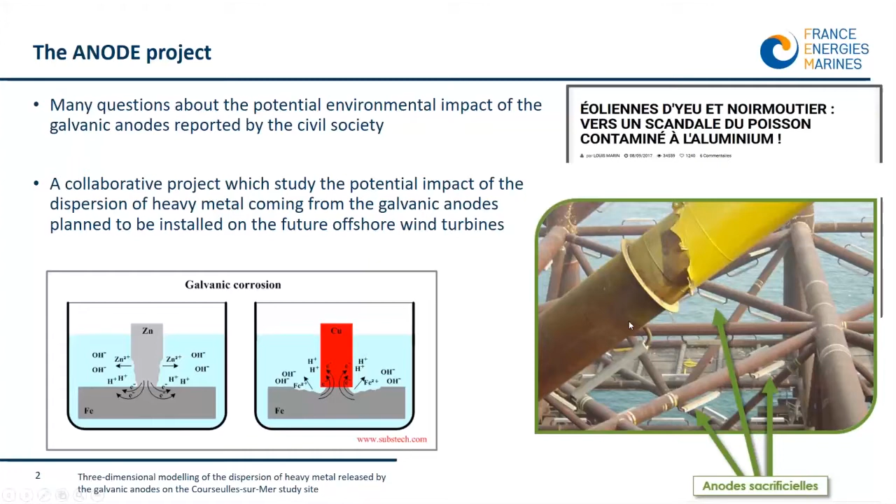Here I will present the numerical modeling on the Courseulles-sur-mer site. This site is located on the north coast of France, in the English Channel. We have performed numerical modeling to know what the dispersion of the heavy metal coming from the galvanic anode will be.

I will not present the validation today, but just to let you know that we have validated the configuration with 2 tidal gauges, one in Le Havre Harbor and another one close to the mouth of the Seine River. We have also validated the variation of the temperature and salinity of the water, which could influence the dispersion of the metal in the domain.

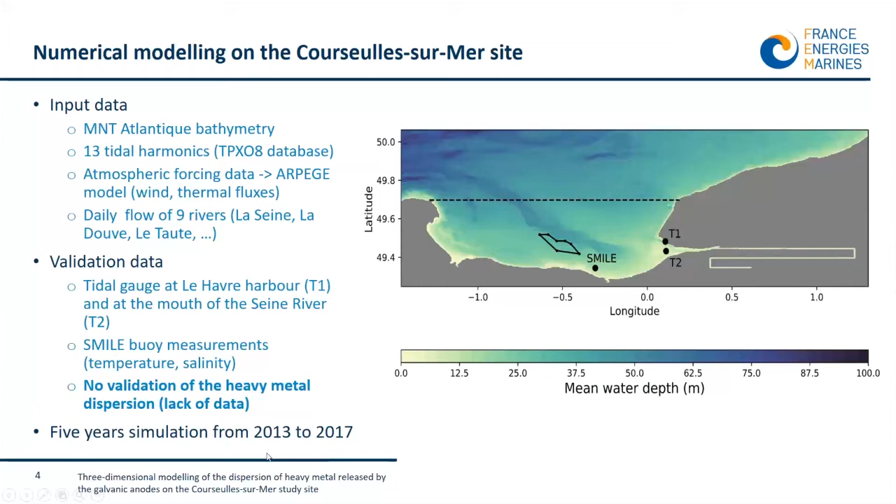However, we don't validate the dispersion itself because of the lack of data, which is one of the first recommendations coming out of the project. This simulation was performed for 5 years, from 2013 to 2017 included.

We have estimated that at each point, every time step of the model, so every 30 seconds, the 15 tons of anode planned to be installed on each wind turbine would release, for example, 455 milligrams of aluminium. So every time step at each point, we diluted this mass of each metal into the domain.

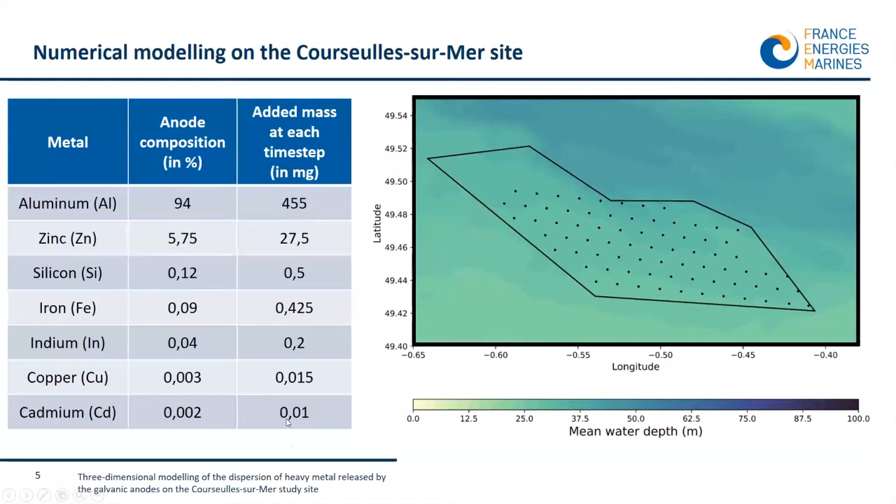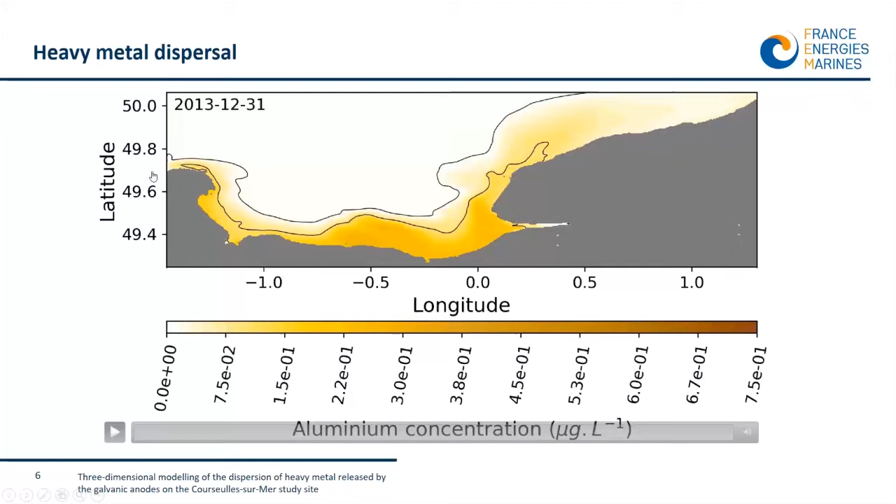The residual currents show us that every metal that will go out through the boundary would be re-injected into the English Channel through the north, and will not come back to this area. So we have considered that every aluminum coming out of this boundary is deleted from the simulation.

So how do we consider the toxicity of each metal? First, for each of them, we have considered that they are entirely dissolved into the water column to be the most bioavailable for each species, which gives us highly protective results.

We compare the results of the simulation to the predicted no-effect concentration, also known as the PNEC, for all metals. For the aluminium, we have two PNECs: one coming from Crane et al. 2007, which is 0.005 microgram per liter. So this is the toxicity threshold. However, it considers only the aluminium isomeric monomeric, so it's just a small part of the total dissolved aluminium into the water.

And we have considered another PNEC equal to 24 microgram per liter, coming from another article, which considers all the dissolved aluminium into the water. However, based on the Klimisch criteria, which tells us that both PNECs are not fully satisfying and need more investigation. However, we only have this data available, so we have to run our analysis with these two thresholds.

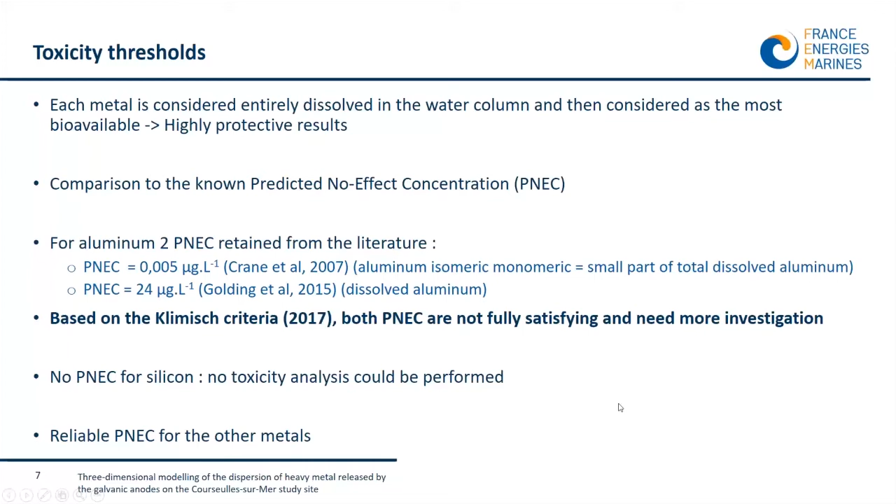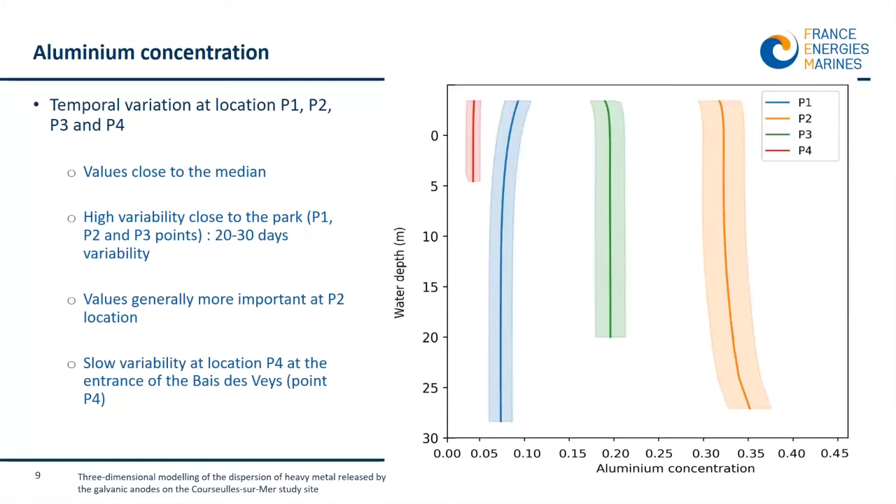What if we look at the 4 points in this domain? First of all, this is a 3-dimensional simulation, so if we look at the aluminium concentration along the water column, we can see that at each spot we have an almost constant concentration. So we will look only at what happens close to the bed, which is the location of the anode on the pile of the wind turbine.

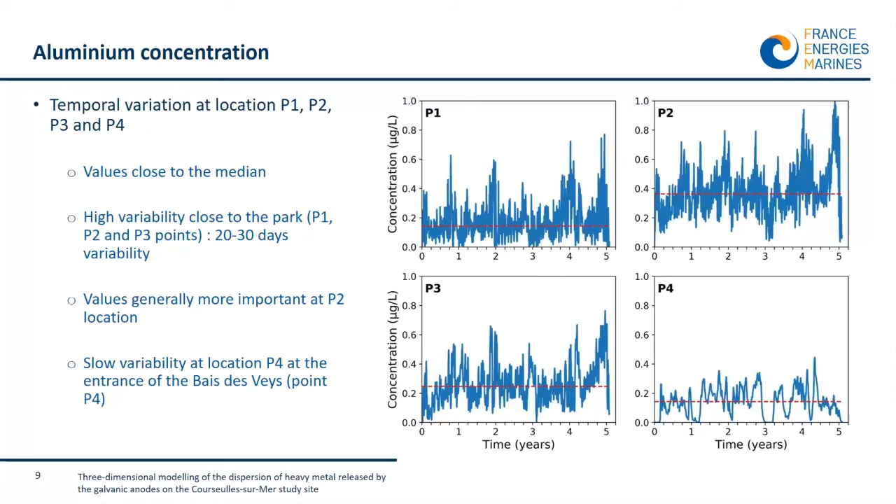So we have to consider the maximum short time exposure and the long time exposure, because we have some species who just pass through this location and others who live at those locations. If we look close to the park, so the first three points...

What is the maximal short time exposure over 2 days? We can see values around 0.8 microgram per liter. And if we look at the long time exposure at the same location, we can see that it decreased a lot, with values close to 0.5.

On the fourth location, the short exposure shows a value of 0.4 microgram per liter, while the long exposure is close to 0.3.

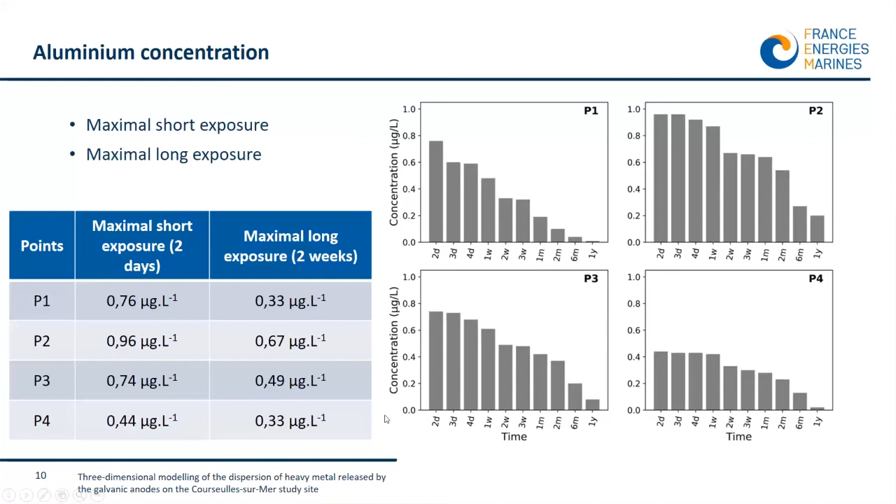All these numbers do not necessarily mean something for you, so here are some numbers to compare with.

We have seen in an article, Gabelle et al. 2012, that he measured in the Seine estuary, very close to the park, concentrations of aluminium between 25 and 70 microgram per liter. So you can see that it's almost 100 times what the anode releases.

And Angel et al. in 2015 reported some measurements in the North Sea, close to the English coast, in natural coastal waters, between 0.5 and 2 microgram per liter. So naturally, the concentration of aluminium is higher than what the anode releases.

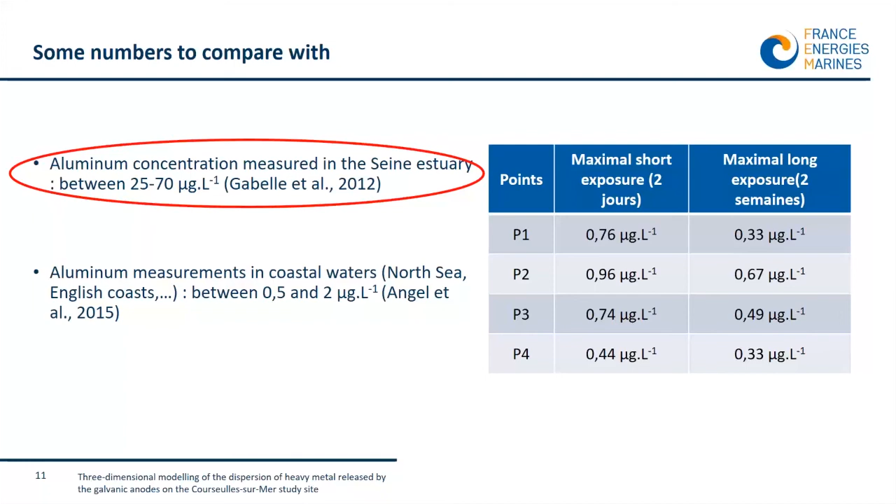So if we take a closer look at this value from the Seine estuary, we have performed two simulations: one considering a constant release of 25 microgram per liter of aluminium coming from the Seine, and another one with a constant release of 70 microgram per liter.